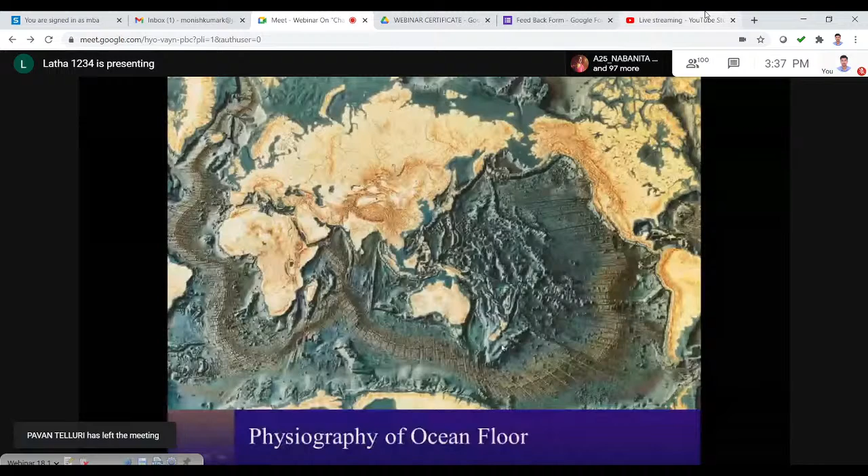So now we will go to the discussion. I will give you the cream of information on this subject. When you look at the world, if there is no water in the ocean, it looks like this. It is much more ups and downs and corrugated, because the world is made out of a few plates which are all moving relative to each other. So you see our India and the surrounding plate. Within this plate itself, you see the ups and downs here. So the whole world is extracting different types of resources to improve the economy.

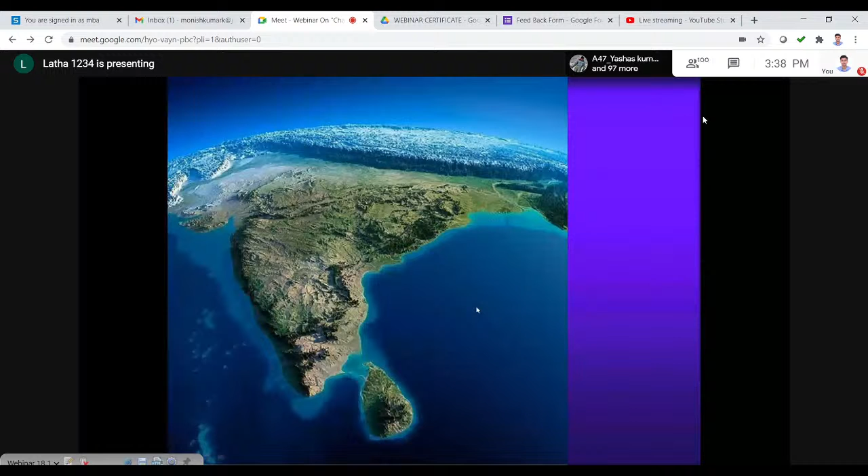And as the Vice Chancellor was indicating, we are not yet effectively using the resources of the ocean to contribute to our GDP. One of the main reasons is we don't have many ocean engineers in India. Not many institutes to train young people like you to become good ocean engineers. We have only very few institutes. The details I'm going to give you. So that is one of the reasons many of our resources in the ocean are not properly exploited. We have to do that.

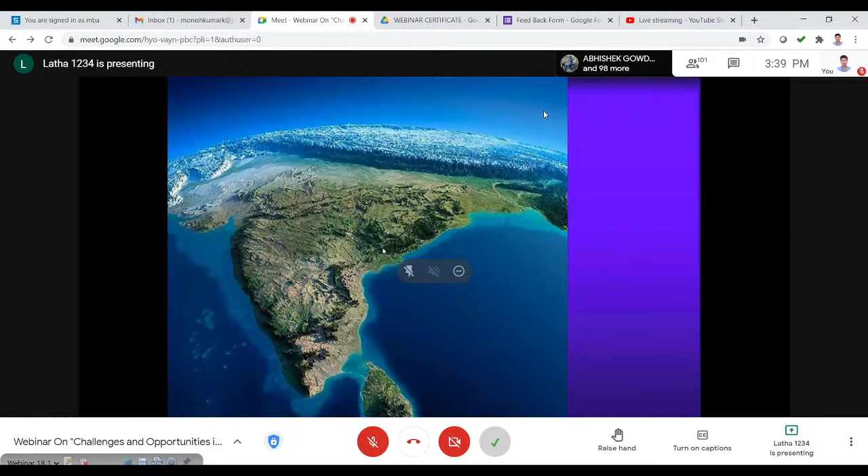Like a green revolution, white revolution, we have to do a blue revolution. Blue revolution is using the ocean and extracting the resources in a sustainable manner without harming the environment, but extracting them for the benefit of the people in India. So for that we need more scientists and engineers in the area of ocean engineering.

Now some of the true facts about the ocean. The ocean covers 71% of the surface. The ocean is a future source of power. All different powers from wave, tide, ocean thermal energy, biomass, water current, these are all sources of power from the ocean.

Ocean is a good source for all types of organic and inorganic material. Any organic substance you name, it is available. Inorganic substances are plentifully available in the ocean. Ocean is a source for potable water.

For us in Gulf countries, in Kuwait, for example, 100% of the potable water we get from the ocean based on desalination. In future, many countries will go for this as population increases. The land-based water resource may not be enough, so we have to go for ocean water for converting into potable water.

Ocean is one of the fantastic recreational sites for people. Who doesn't love to go to the beach to spend some evenings? Many people love to have their homes near the beach because the music of the waves moving and breaking and the marine life, they all attract people to stay near the ocean, and it is a lovely recreation.

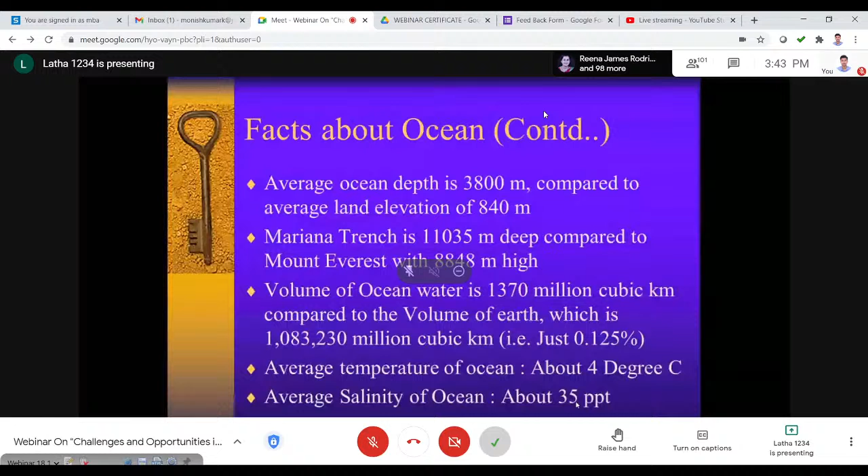Average temperature of the ocean is only 4 degrees. See, that is why it is working as an air conditioner. Average salt content is 35 parts per thousand. Take 1 cubic meter of water, evaporate it, you get 35 kilograms of salt. The predominant salt is sodium chloride. Then you get many other minerals, magnesium, calcium, like that, plenty. A typical coastal area, you see, is like this.

The coastal area is the highest in biodiversity on the earth. Everybody nowadays is talking about blue economy, meaning how to use the ocean to improve the economy of the country. Tourism and development in many countries, like Dubai and Singapore, are because of good beaches and good coastal infrastructure. Why do people visit these countries? Because they have very good tourism development related to coastal and ocean infrastructures.

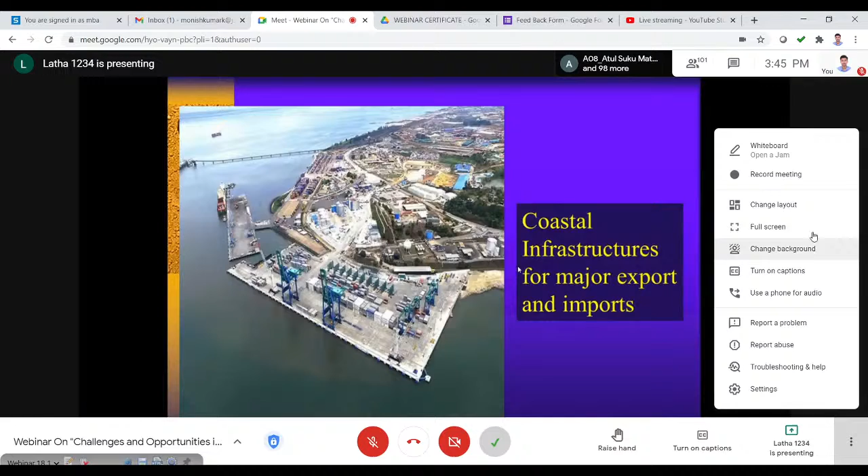We can talk a lot about different types of coastal infrastructure. One of the main infrastructures for every coastal country is ports and harbors, like this. Without ports and harbors, no country will export and import goods economically. So to develop such infrastructure, you need engineers with specialized knowledge in the area of analysis, design, construction management, maintenance, operation, periodic servicing, and new infrastructure development of these types of facilities.

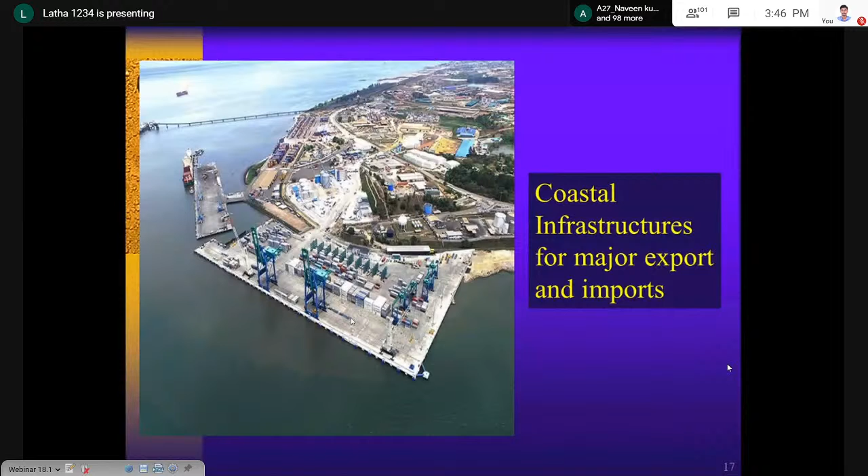So you need special knowledge: civil engineering plus additional knowledge for successful construction of all these facilities. We will see them one by one. Not only civil engineering infrastructure, but nature's infrastructure. As engineers, we need to also understand how nature builds its own infrastructure, like mangroves.

Even in India, we have many coastal areas rich in mangroves. In the southern part of India, including Karnataka, many areas have wonderful mangrove forests on the coast. They are actually natural civil engineering structures. And natural corals are also engineering structures built by nature for the beneficial use of humans.

The coral reefs and the beach area help develop a lot of life. Also, they break the energy of the waves during storms and help us reduce beach erosion. If corals were not there, a lot of areas in India as well as around the world would lose the beach.

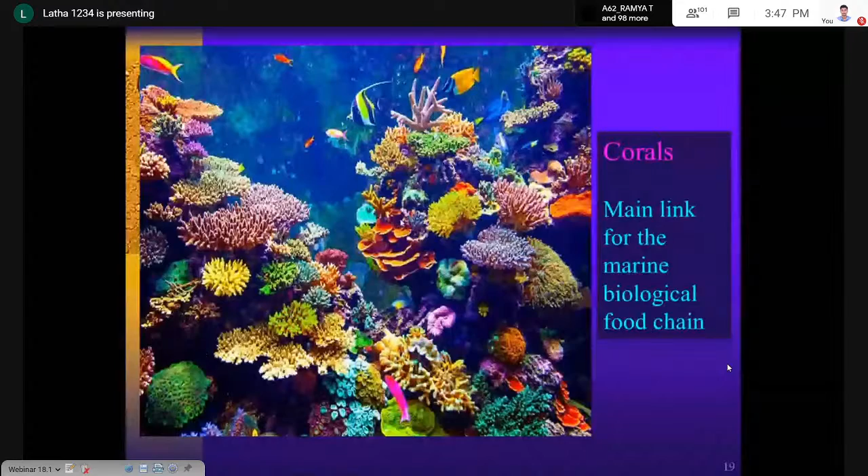Sea also contains many different types of seaweeds. Many countries use it as a rich source of food, like Japan, Korea, China, and all Southeast Asian countries. They all use different types of seaweeds as a source of protein and minerals. We don't use it in India, it is not the culture, but the truth is it contains a lot of very rich nutrients. And people nowadays also try to use this as a biofuel.

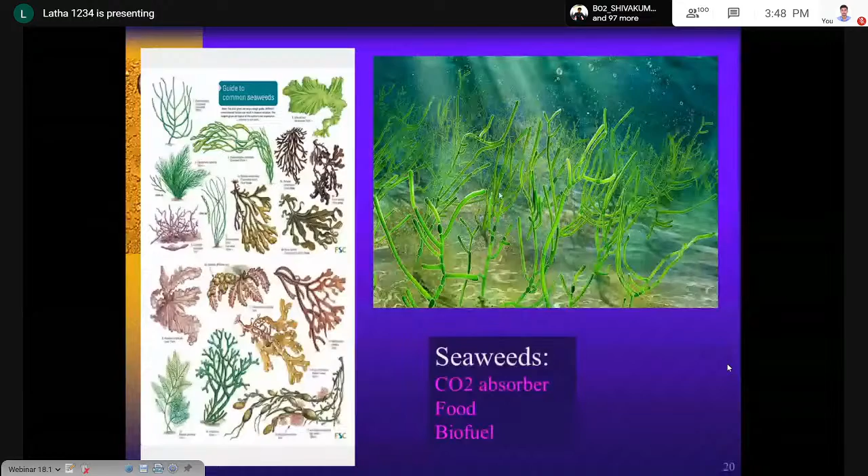So to exploit these resources, you need engineering, correct engineering. I am sure everybody knows about the benefit of the ocean for protein in the form of different types of fish, prawns, crabs, shells, also octopus, you can name it, all these things, plenty.

Ocean, as I told you, is a natural air conditioner. It works as an air conditioner by moving cool water from the north and south poles to the equator. So when it is moving cool water from there to the equator, all the countries around the equator become cooler. And when it moves hot water from the equator to the northern countries, the chillness reduces in the northern countries. So that is the way the great ocean belt works here in the Atlantic Ocean, Indian Ocean, Pacific Ocean. The ocean does it by nature, following the principles of physics.

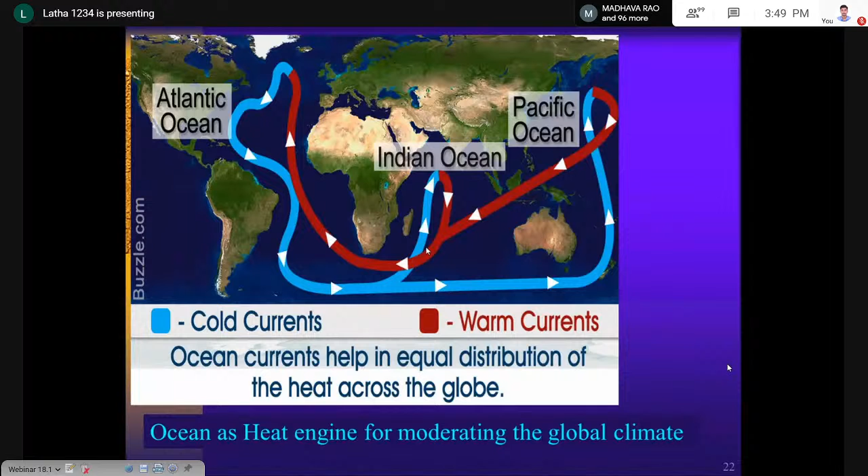Imagine as a human being, if we wanted to do it artificially using our knowledge, every day we would have to spend many billions of dollars for cooling the land masses here, for heating the land masses here. If we wanted to burn fuel, billions of dollars we would have to spend every day. Ocean is doing it free of cost.

Ocean is a very rich source of energy. Many different energies, for example waves, current, offshore wind energy, a huge amount of energy is available. As engineers, we have to design systems correctly to extract the energy efficiently. Even in deeper water, nowadays, knowledge is developed to make offshore floating wind farms with each windmill about 7 megawatts. That is the order of capacity people have developed over the last 20 to 30 years. So engineers need to work here to design and install different types of structures to extract renewable energy.

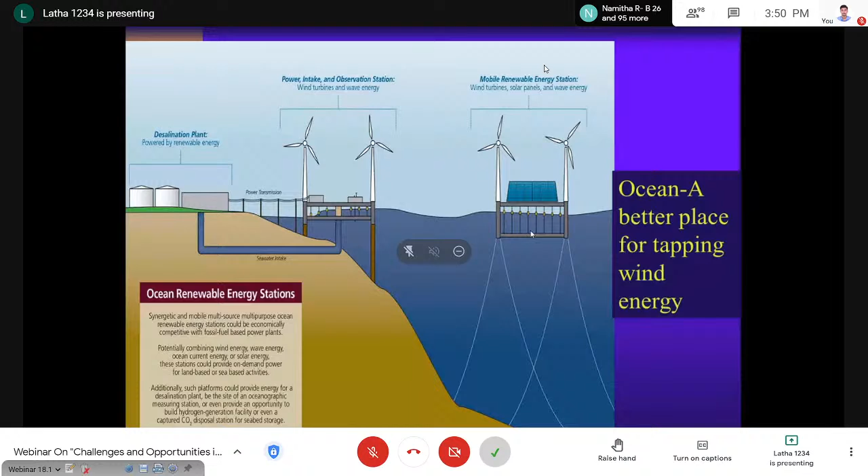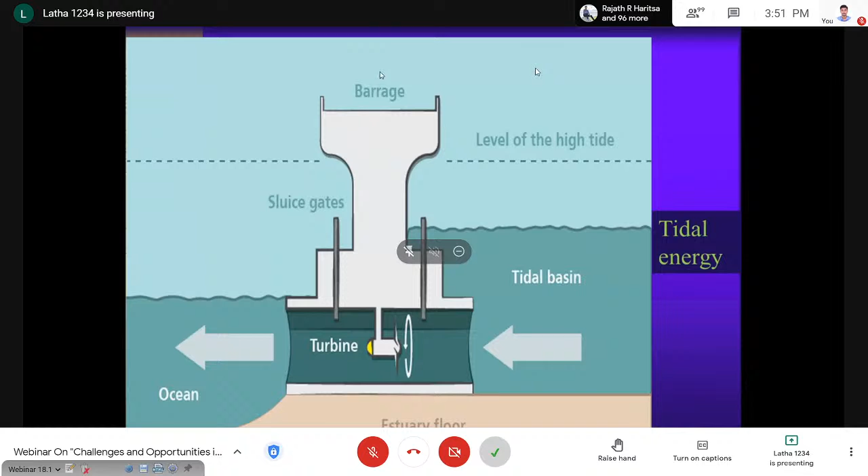Also, we need engineers to design tidal barrages to extract energy from tidal variation. For example, in India, around Gujarat, also in West Bengal, we have huge tidal power potential. But we don't have enough engineers to design the system.

Ocean contains unbelievably huge energy from thermal temperature change. It is called ocean thermal energy. This ocean thermal energy itself is sufficient for India. For example, the seawater around India, if we extract energy using ocean thermal power, that is more than sufficient for India. We can stop all power production using coal, oil, and wood. We can stop all the polluting sources.

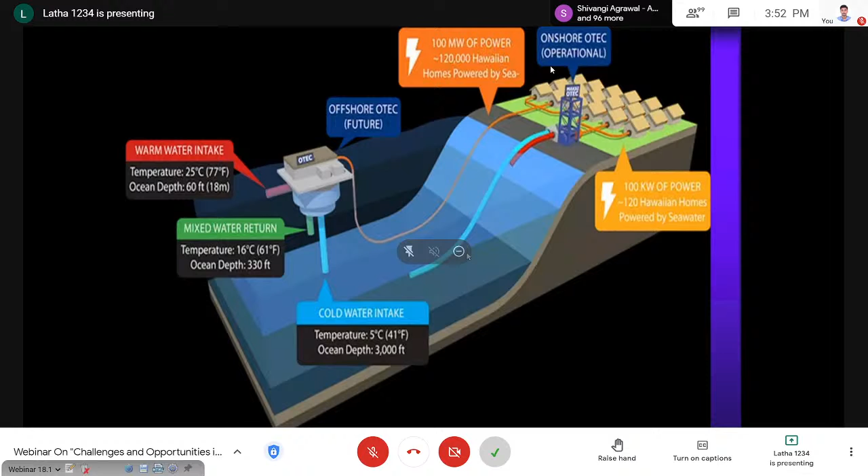Science and technology is available, but what is not available is an economical way of building these infrastructures. So that is where the challenge is. Engineers like you can work on this type of civil engineering structures, how to make them economical from the material point of view, from the construction point of view, from the installation point of view, by increasing the lifespan, selecting suitable material for the ocean. You can select these areas to work on for the success of this type of power.

Desalination: in many states in India, people are already using desalination. For example, Chennai always faces water problems in summer, so they are installing additional desalination plants. So even for desalination, you have to take water from the sea. Taking water from the sea, you have to build a structure. That is where the engineering challenges are.

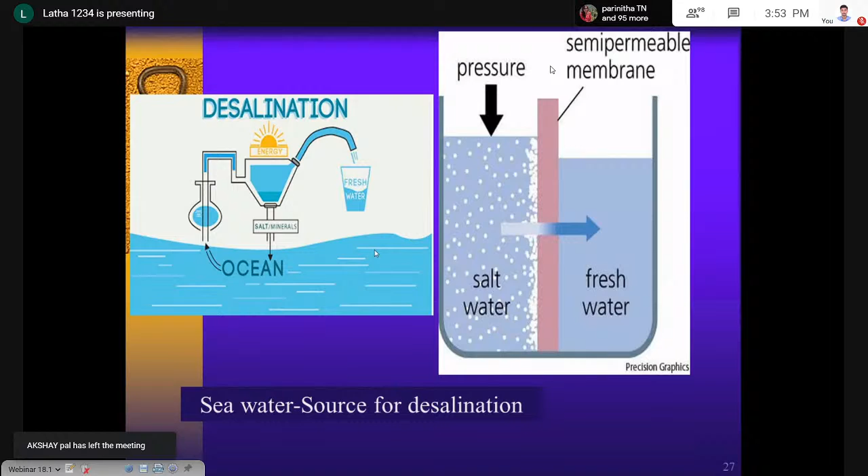Apart from all these things, the ocean is a source of wonderful medicines. You can extract so many quality medicines from ocean water, the ocean seabed, from corals. Unbelievably, the ocean has so much medicinal value. So if anybody starts an industry to make ocean medicine, you will really flourish in this business. The ocean gives such a great opportunity to start your own industry.

The total coast length of the world is 1 million kilometers. This is the length of the coast of the whole world. These facts will fascinate you. More than 600 million people, that means around 10% of the people, live in the coastal area. Similarly, 2.4 billion people live within 100 kilometers. So this shows how important it is for people; they want to live closer to the ocean, in the coastal area.

Nowadays it is always required for an engineer to know the economic value of a project. After your graduation, if you work in a construction company, say L&T, Larsen & Toubro, and you are working on a project, people will always ask you, what is the project budget? And you will say it is 1,500 crore, something like that. You will say, I am working on a project constructing a 3-kilometer bridge in the ocean or crossing a river, which is so much crore. So it is always required to know the economic value of the project.

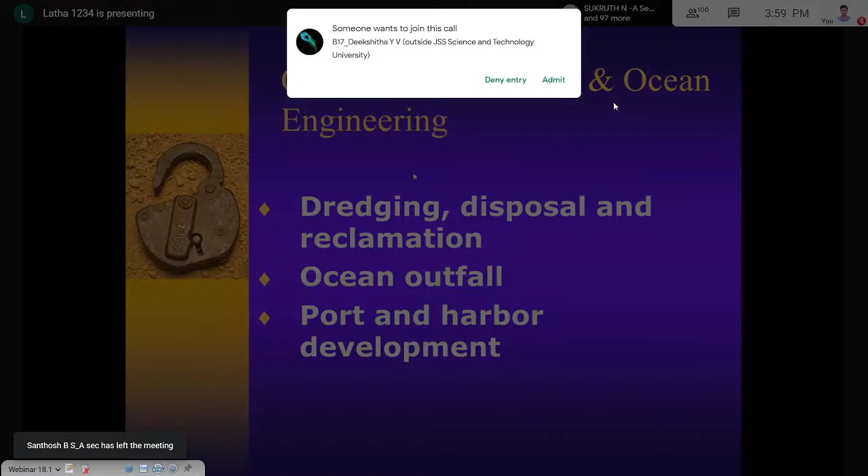For that we have to know the environmental forces from nature: tsunamis, waves, tides, cyclones, global warming and sea level rise, coastal erosion and how to control it, and how to dredge material in the ocean like Dubai. Dubai is building a lot of infrastructure into the ocean by dredging and using the material. Singapore is increasing its land space by dredging from the sea and building new islands. Many countries are doing new land formation and new island creation in the ocean by this type of activity.

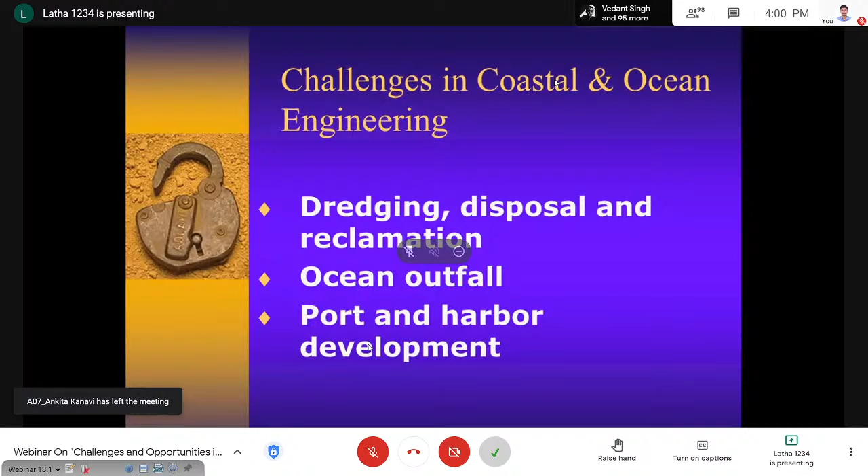We also use the ocean for proper disposal of wastewater; there you have to design a disposal system. And we have to build new ports and harbors for countries' development. There you need a lot of knowledge. If you work for a desalination company, you have to know how to take water, and after desalination, how to dispose of the water properly. All power plants in coastal areas around the world take water from the sea for cooling, so here also we have to know how to take water properly. And saltwater intrusion is one big problem.

The seawater intrudes into the land aquifer. I mean, the water resource in the groundwater is intruded by salt water, so we have to learn how to prevent it. And anybody who wants to join offshore ONGC, Oil and Natural Gas Corporation, they design offshore drilling platforms, install them and extract oil from the sea. So you need to learn the ocean engineering subject.

Mining in the ocean: many minerals we don't have enough of on the land, so we have to go to the ocean for mining. Energy: even if all the energy sources are completely vanishing, still we have energy from the ocean we can extract. Engineers also need to know how to prevent corrosion of ocean structures. And you also have to learn about sediment transport and its problems.

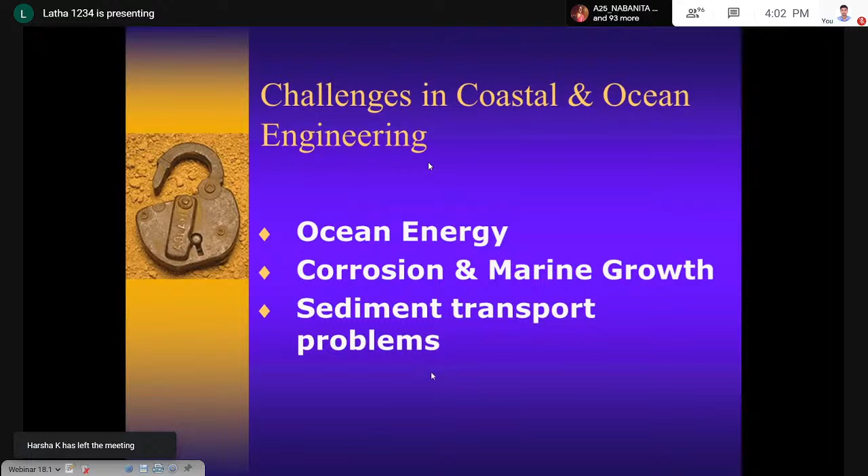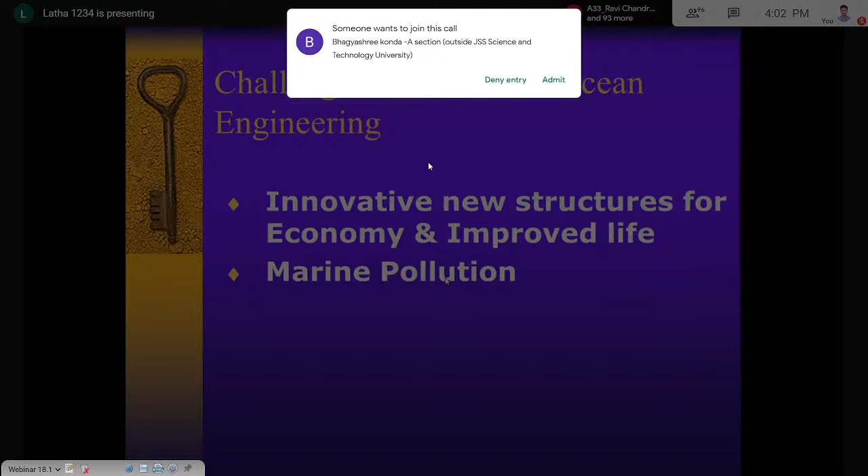If you go for higher studies, PhD, postdoctoral, then you will land up in a good research institute doing innovative work. So that is the topmost point in this discipline. Innovative structures are needed, mainly from an economic point of view. To extend the lifespan, we need a lot of innovation.

Pollution in the marine area is one of the big problems. We need a lot of engineers to work and reduce ocean pollution. Particularly nowadays, plastic pollution in the ocean is becoming a big problem. We need more engineers. We will see one by one, quickly. I am not going to explain in detail, but I will quickly go through pictures so you know what it is.

Tsunami is because of an underwater earthquake. You know that. India is in a place where tsunami possibilities are always high, risky. Particularly the east coast of India has tsunami risk from the Indonesian plate junction. Similarly, the west coast of India also has tsunami possibility from the Pakistani plate.

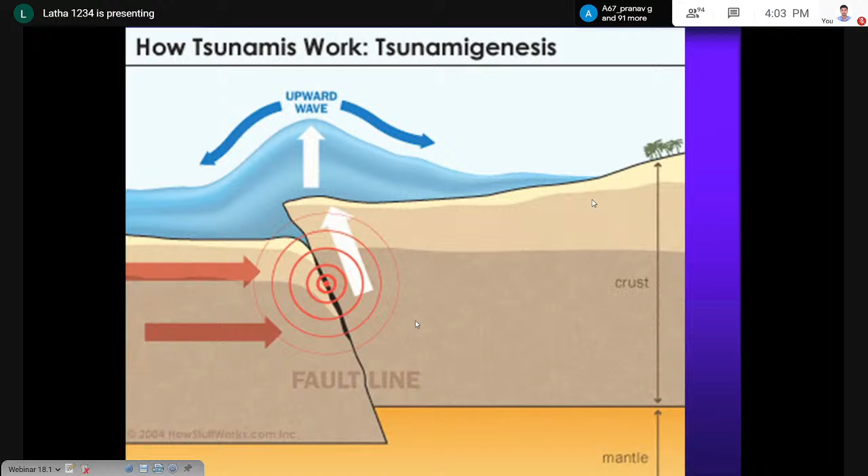During a tsunami, sometimes you will get waves of many meters, equivalent to many floors of a building. If it occurs, they completely destroy infrastructure. So in such a situation, as engineers, we have to know how to design structures with such strength, or how to manage to escape from such impact. So we have to learn. This is another picture. You might have seen it in some videos of tsunami-induced flooding in the coastal area.

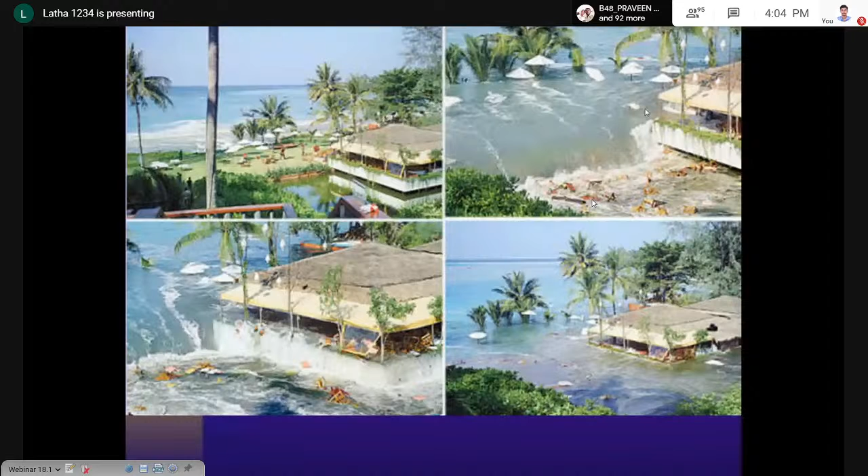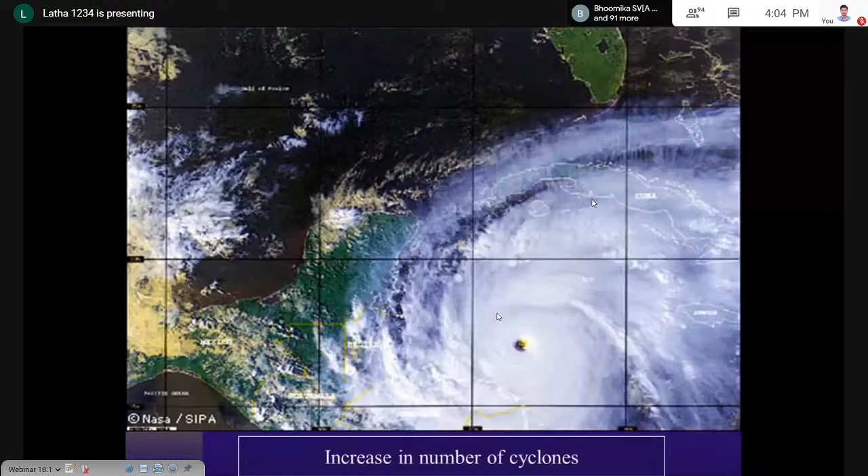Secondly, cyclones. India is prone to cyclones, and many infrastructures we have to design for cyclone wind speed. So, cyclones we classify into 5 categories. Category 5 is the worst cyclone, with a wind speed of more than 155 miles per hour. 155 miles per hour means almost 250 kilometers per hour. Every year we have this type of cyclone, not only in India, everywhere around the world.

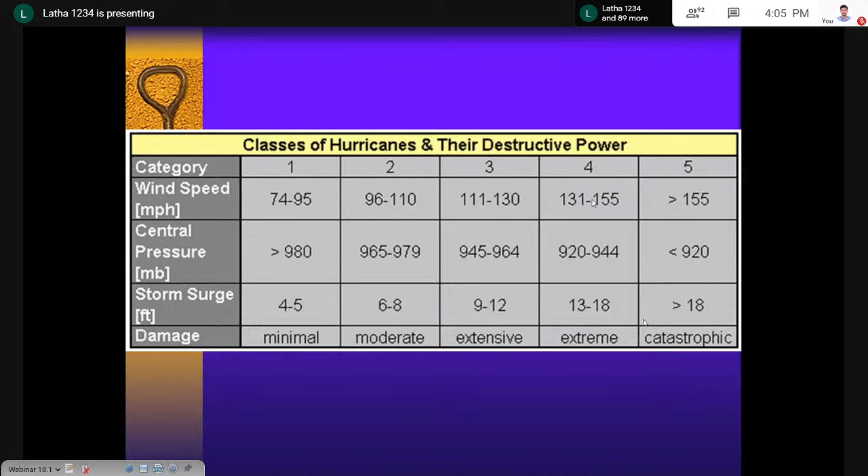With the storm surge, the water level surges to more than 18 feet, 5-6 meters, entering into the coastal area. It creates a catastrophe. So we have to learn how to protect life and property from such types of events. We need to design infrastructure to take care of such loading.

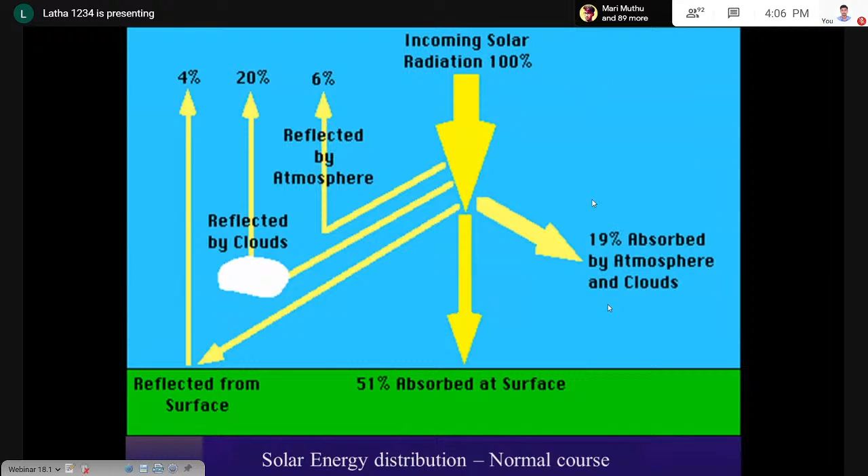Global warming slowly keeps on increasing. The warmth of the globe is increasing. Because of that, sea level is rising. Before industrialization, the solar radiation falling on the earth all went 100% back. Now it is like this. See, now because of greenhouse gas, not all the solar radiation goes back; it is retained here.

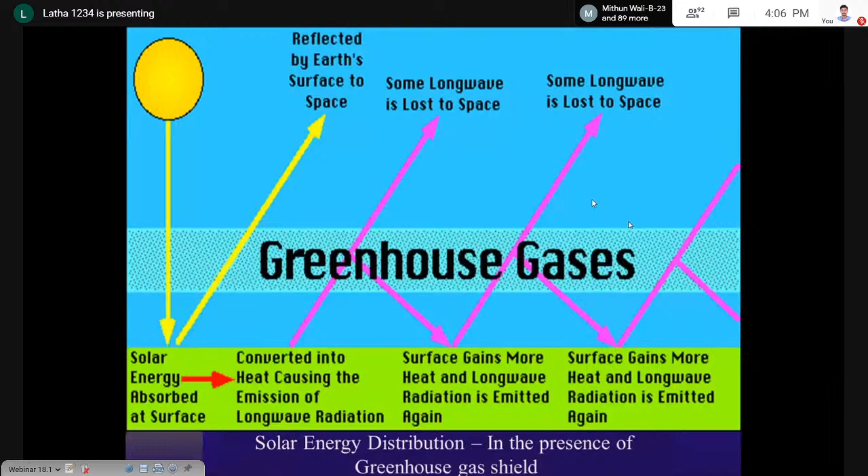What I mean is, in some major cities like Beijing, Delhi, already the carbon dioxide level sometimes crosses 700 ppm. So it is not good to live in such places because it will create asthma, all types of problems related to breathing. Imagine if it goes like this. Who can live in a place with 1000 ppm of carbon dioxide? Nobody can live.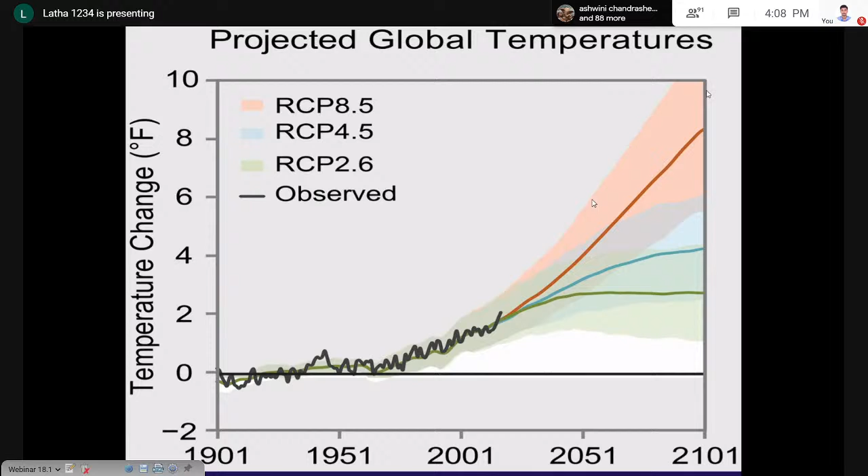So we have a great role here. As an ocean engineer, we have a much bigger role in this part. Similarly, the atmospheric temperature in 2100 may increase by anywhere from 2 degrees to 8 degrees Fahrenheit. You can imagine easily: if 8 degrees Fahrenheit is the increase in temperature, how do we live?

It is very difficult. Similarly, the sea level may rise by 1 meter by 2100. A 1 meter sea level rise means major cities in India will all be in water. Okay, so like this. From an engineering point of view, we will see some of the important engineering aspects. First, I am going to talk about coastal erosion.

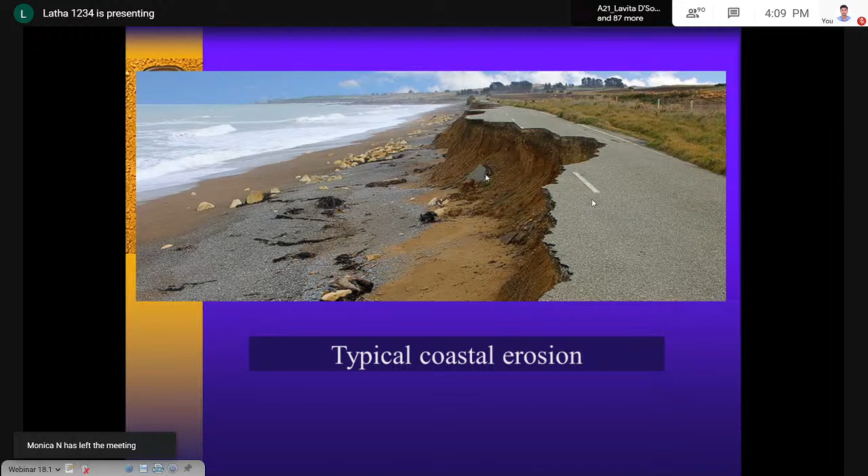The world spends more than a few billion dollars every year for erosion protection. Erosion is nothing but removal of coastal soil from the coast, from infrastructure like roads, buildings, anything here. If the soil is removed, it is called coastal erosion. As an engineer, we have to design coastal protection. This is a problem. So how to solve the problem?

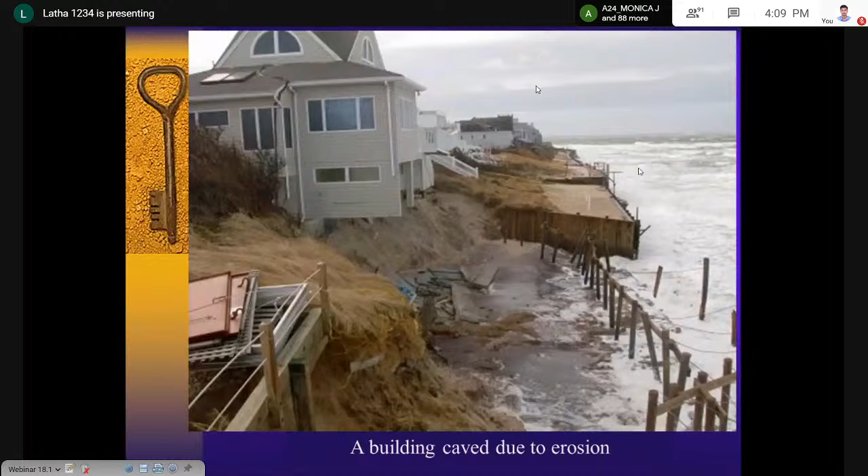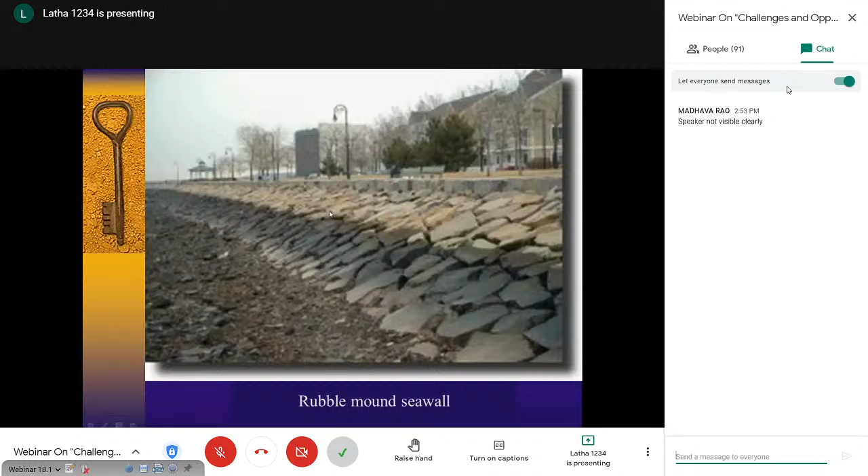And there is another solution called a seawall. How to design them? This you will learn in ocean engineering. Or designing a sheet pile wall. I am sure you are all learning soil mechanics and foundation engineering, but you have to extend your knowledge to design them in a situation like this, where one side is water with waves, the foundation is fully saturated, and on the other side you have land with elevated infrastructure.

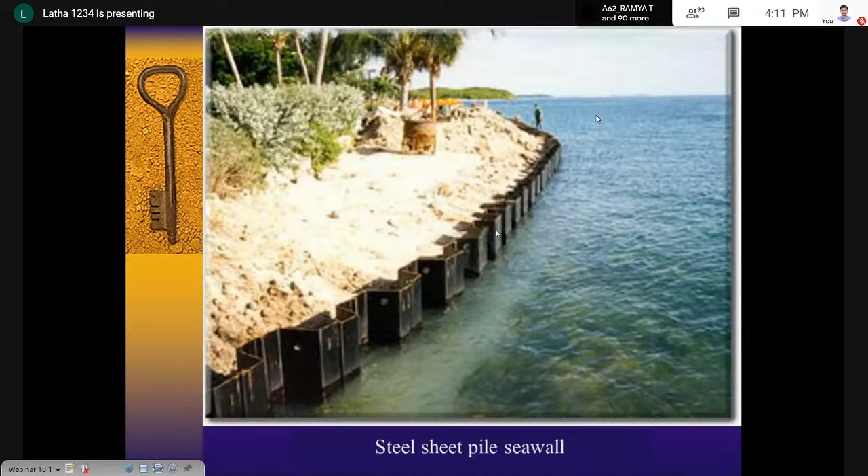So you have to extend your knowledge to design sheet piles, and you have to design them to make sure they are not going to corrode quickly. So you have to be an engineer who designs corrosion protection as well.

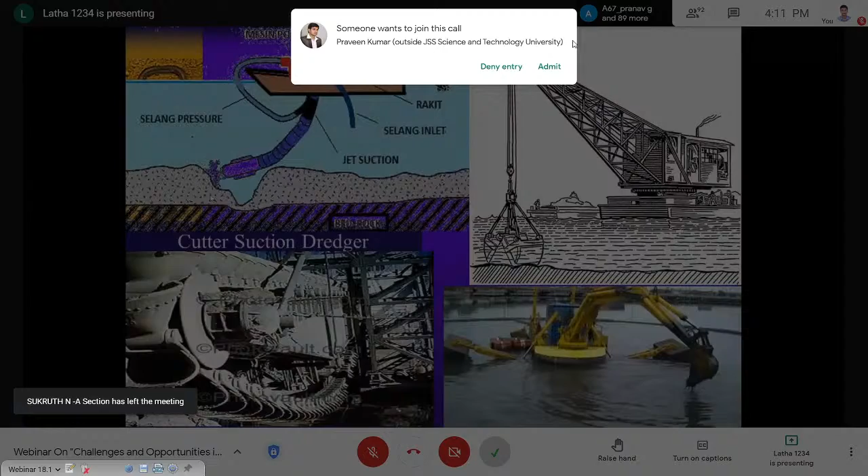Dredging and disposal is another engineering area. You have to learn what type of subsea soil is available at a particular site, whether it is clay, silt or rock. As an engineer, based on the seabed material strength, you have to select a suitable dredger, and after dredging, you have to either reuse the material, like building islands in Dubai, or dispose of it correctly.

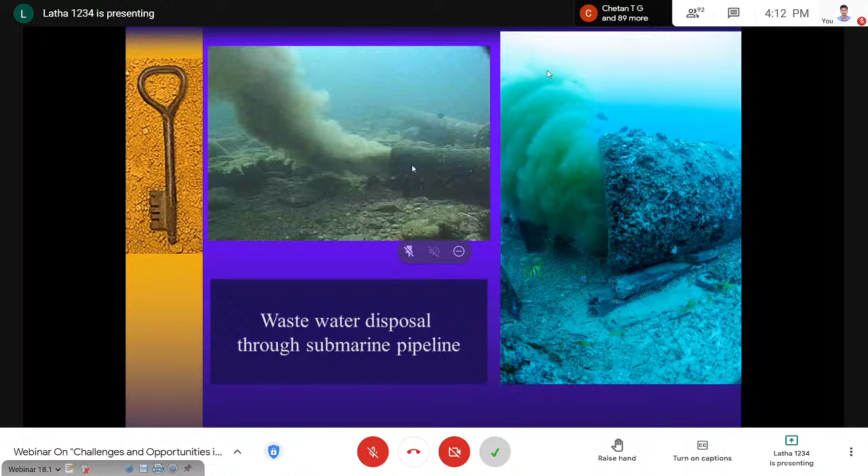If you want to send this wastewater into the sea, you have to go into deeper water with a submarine pipeline; you have to design pipelines, and this is completely an ocean engineering subject. Wastewater coming from the land after preliminary treatment is stored in a tank to provide enough head to push the water. Water goes through the pipeline, and you discharge it at many points to make sure it is not polluting the area and pollution levels are within permissible limits. So this is the engineering you have to design.

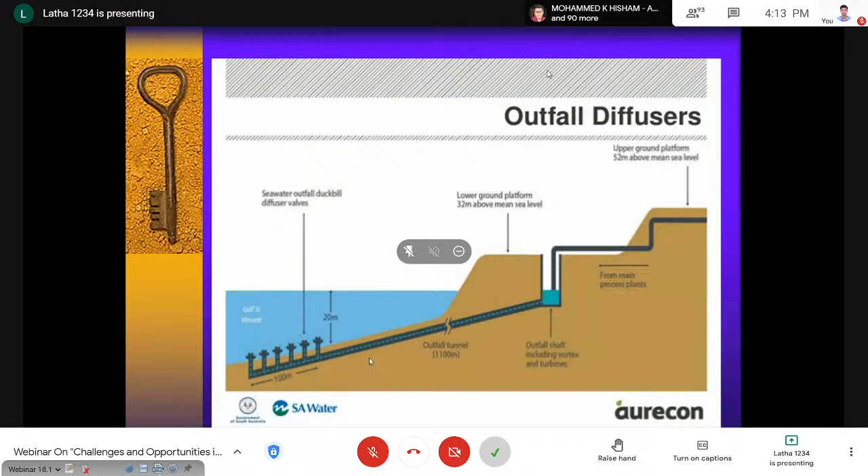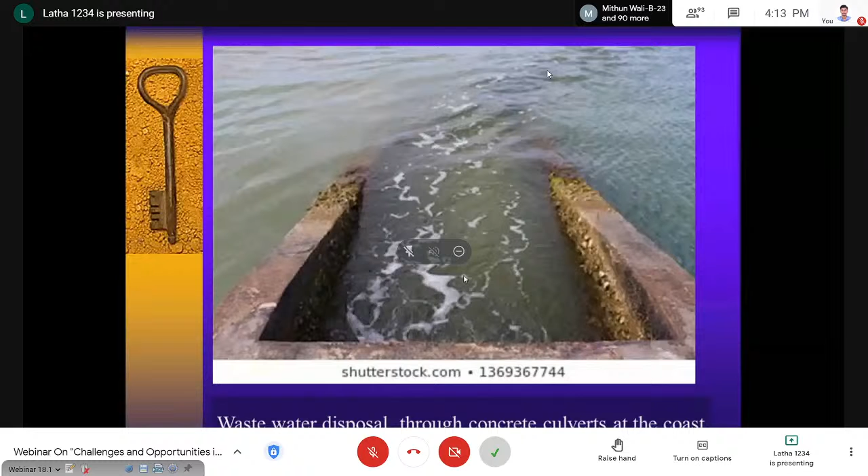In many countries, people dispose of wastewater in the coastal area, which is scientifically not correct. So I am showing this picture, which is not correct. People have designed culverts to dispose of water in the coastal area, but it is not an environmentally right approach.

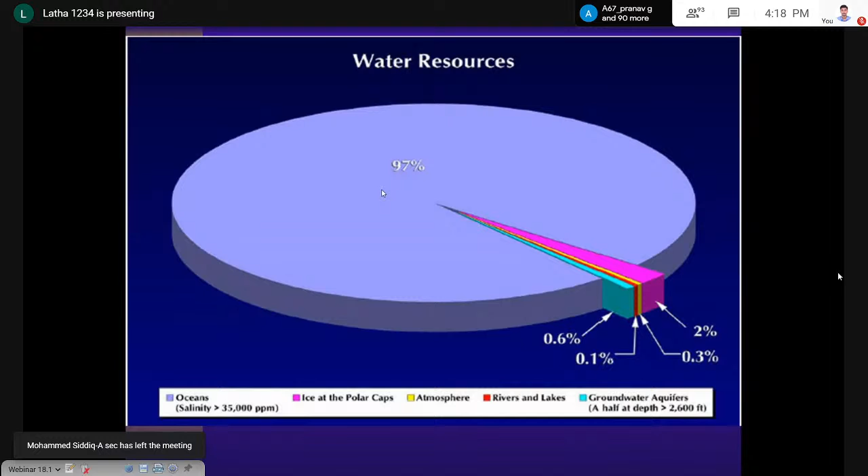So we have to know ocean contains so much of water. As an engineer, we have to know how to take the water and efficiently convert it into fresh water using desalination. Similarly, cooling water for power. All power generation in India on the coast, they take water from the sea.

And we people, we work on this infrastructure development. How to design this infrastructure for seawater intake. For example, you have to take water from here without sediments, without marine life. You have to filter and then take the water. The water coming here must be clean. Otherwise, if water is not clean, when it goes into the system, it will create a lot of maintenance problem. So you have to design a seawater intake system with the screening. Concrete structure, strong enough, sitting on the seabed, like that you have to design.

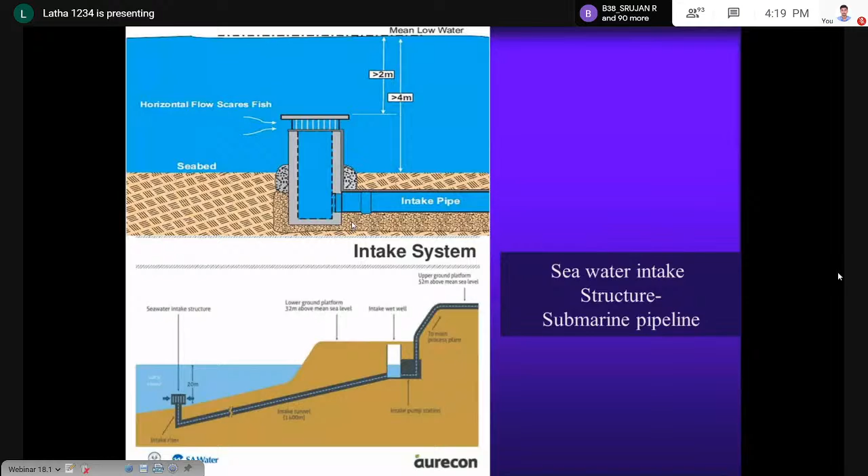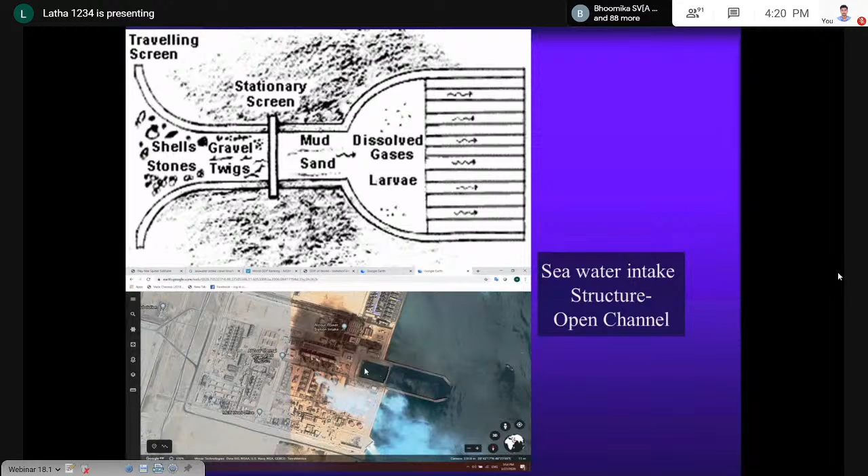It is a typical seawater intake structure in Kuwait. You see here, this is a concrete wall. Another concrete wall, we have screen here. So we design these type of structures. So then what will happen? Water will enter, primary screen, secondary screen, clean water here. We take this water for cooling of power plant.

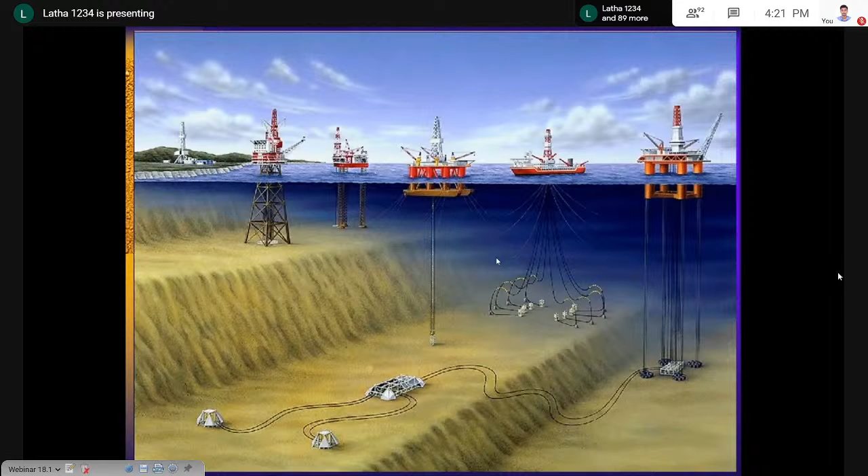Next important engineering aspect is subsea oil and gas exploration. And you might have heard about all these things. In India also, ONGC, GAIL, many companies, Cairn, they all do this offshore oil exploration. This is the type of structure India uses in shallow water condition, like 100 feet. People make a steel structure called jacket platform. So we are the engineers who work out on the wave forces, impact, loading, and then we design these structures.

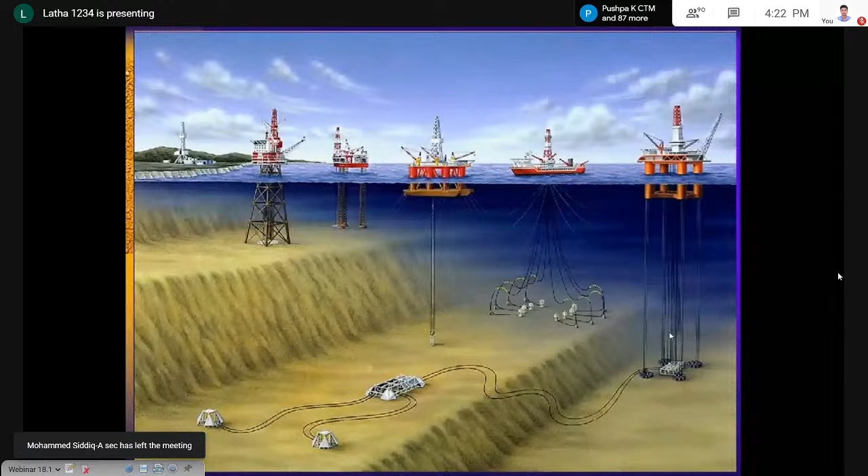Okay, similarly other structures in deeper water. When you go to deeper water, order of kilometer, you cannot have this type of structure. It will not work out economically. So you have to have tension leg platform. This tension leg platform, they move with the wave forward and backward. So as an engineer, we have to analyze its movements. We call dynamic response. And we have to apply enough tension here to take the load to the foundation to make sure they are not drifting. Okay, like that. So all these things you learn in ocean engineering.

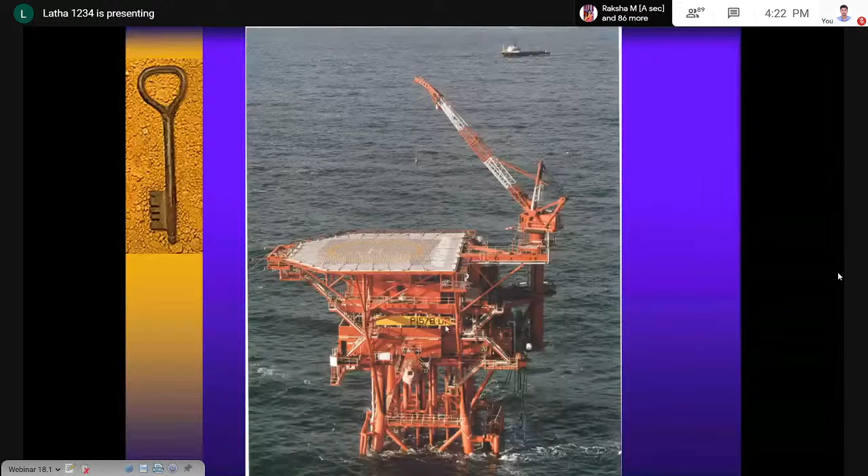Okay, so you have to design them for extreme winds. The upper level of the deck, you have to design for extreme winds, and we need to know how to design. Also, we design gravity type platform where you have concrete structure, huge. This is like a 25-30 meter diameter, huge structure. People build it, and when they extract oil, temporarily they store oil here. When ship comes, they transport the oil, then they fill it with water. Okay, like that. And in deeper water, they extract oil and then pass it to the ship.

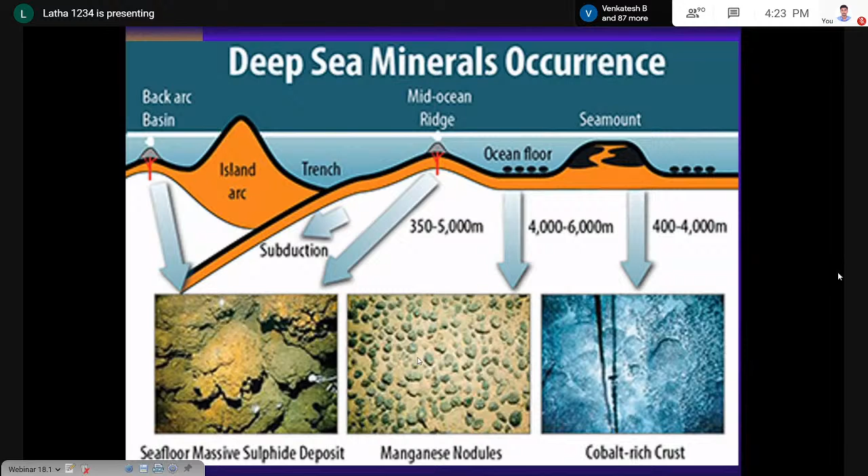Mining is the next engineering. Okay, ocean bed have so much of different minerals, like sulfide, manganese nodule, cobalt. These are all minerals at ocean bed. So we have to do economic exploitation of all these minerals. Next one is ocean energy.

Just to tell you, to create interest, 2025, the whole world needs 30 million megawatt energy. This much is a requirement, 30 million megawatt. You just see how much is the potential of OTEC itself. 40,000 million megawatt is a potential. What we need is only 30. What is available is 40,000. So what does that mean? We have more than 1,000 times our need available as energy in OTEC alone.

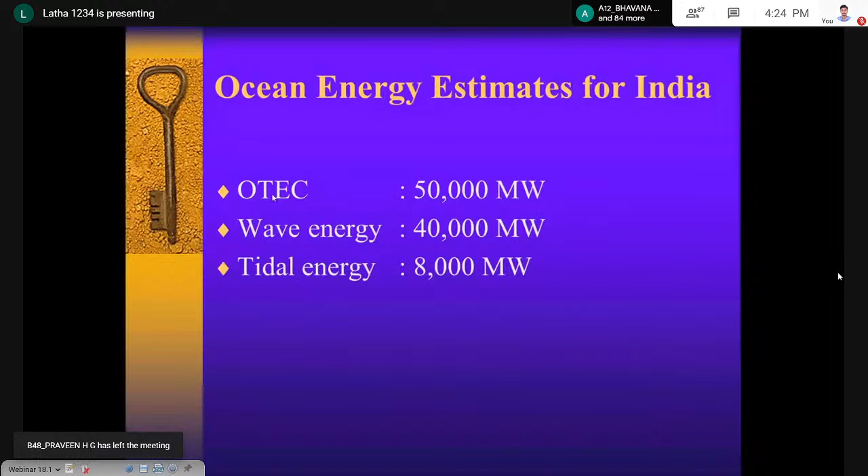But still in India, particularly for example, west coast of India, Karnataka, Kerala, Goa, Maharashtra, they have enough wave energy potential. Technology is developed, but civil engineering cost is very high. Okay, so I'm telling you, if you think how to reduce the civil engineering cost for the structure to extract wave energy, that is a very great area for your future. Okay, I can tell you.

So wave energy you can extract using different techniques, but every technique needs material and infrastructure. That is the common. Okay, in India we tried during 1990, we tried oscillating water column. In Arabian Sea, we built one pilot plant. I was really enjoying doing the work in the field, construction of wave energy caisson using oscillating water column. The civil engineering cost was 80%. So that was a problem. How to reduce them is the main point.

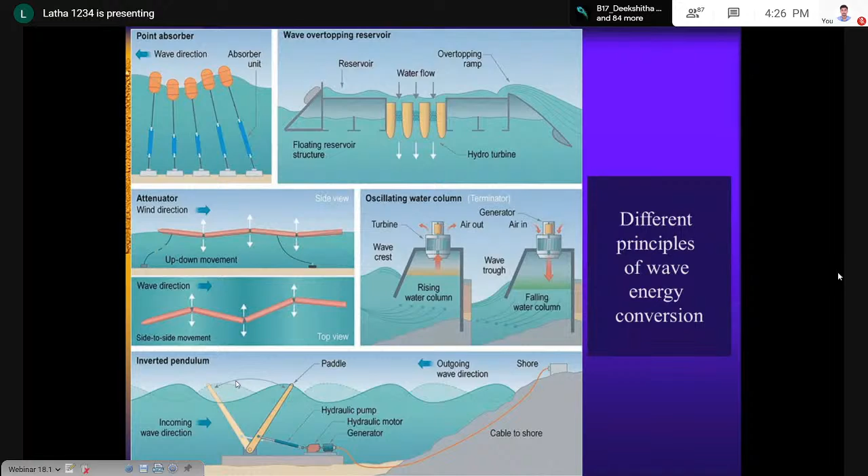And we are now advancing towards commercialization. In the near future, you will see commercial wave power plants. So if you get an opportunity to work on such power plants, it is a blessing.

Next is tidal energy. For example, you go to Gujarat, both sides of Gujarat, Gulf of Kutch, Gulf of Cambay. Sometimes there will be no water, sometimes you will have enough water. So you just build a barrage in between, and you will generate energy. It's like a dam, exactly. Principally it's like a dam, but you are using the potential energy of the water rising and falling.

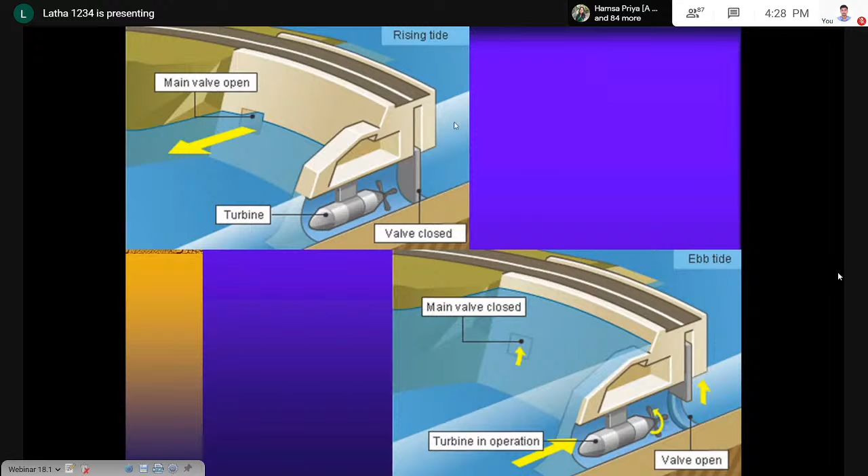As engineers, we have to know how to build these reservoirs in a dynamic environment. That is the beauty. We have very great experience building dams on land, freshwater dams. But we have to take the technology for building dams into a dynamic environment in seawater. That is what we have to do.

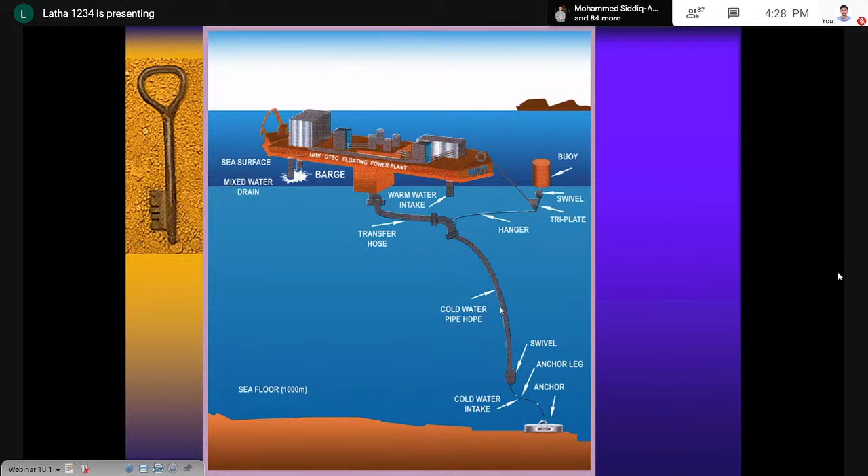Ocean thermal energy. The principle is, surface water is warmer. You go down by 700, 800 meters, the water temperature is almost 4 degrees centigrade. 28 degrees centigrade water here, 4 degrees centigrade water there. The temperature difference can be used to convert energy. So you need infrastructure like this. Pipes spanning 1 kilometer long, how to design them. So these are all the questions.

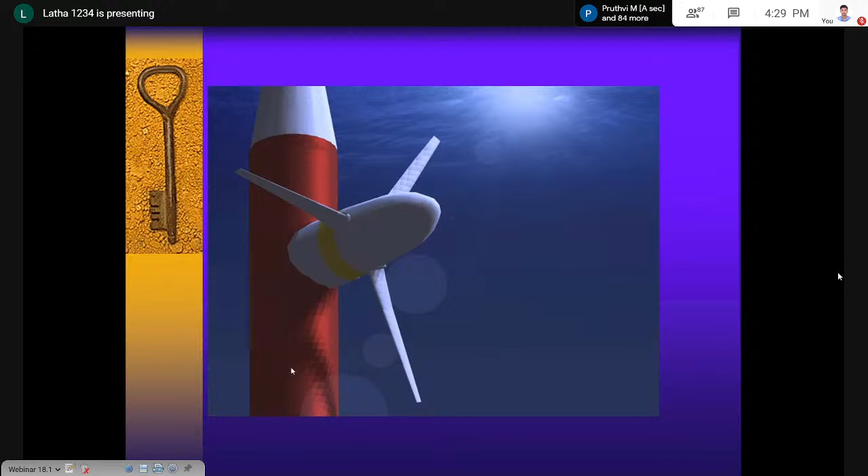Similarly, like a windmill, you can use turbines to extract energy from ocean water. We need to design the piles and how to drive the pile into the sea. All these things you learn. Though it is wind energy, the structure is in the ocean. Ocean engineers have designed this structure to install offshore.

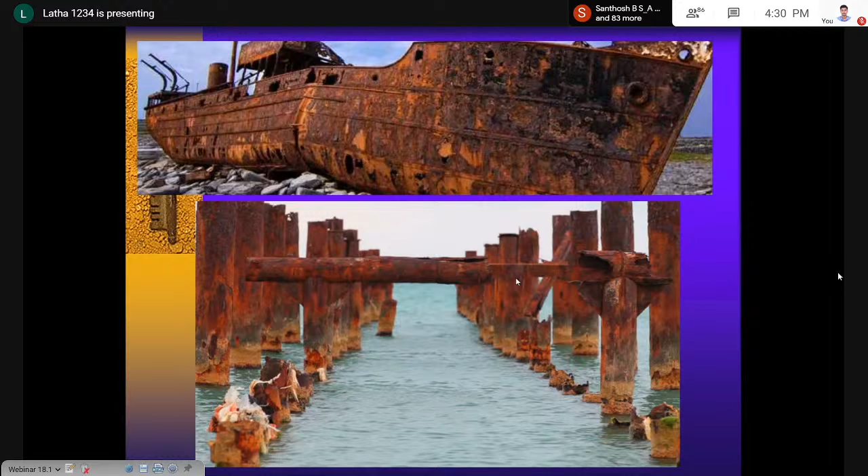Next is corrosion. I'm just showing you some pictures of corrosion and marine growth. It is a big problem in the ocean. As engineers, we should try to solve this problem. Sometimes poor painting results in very severe corrosion of ships and offshore structures. So nowadays solutions are available, either using zinc as anode or a proper polymer paint properly applied. We save the structures.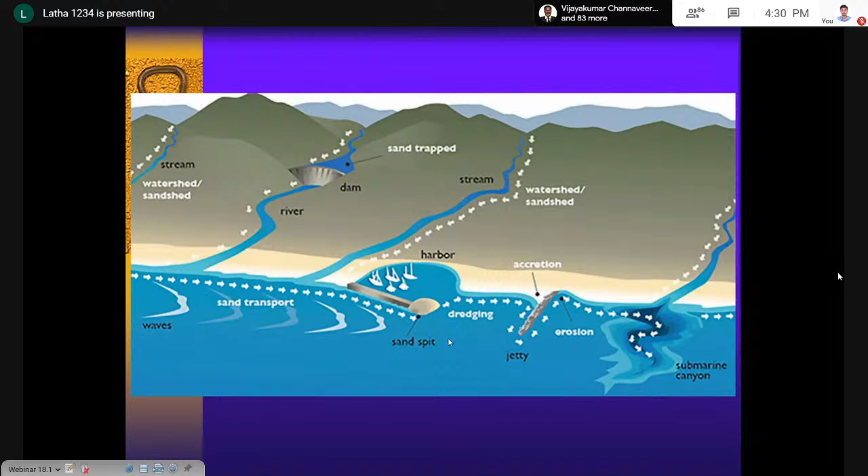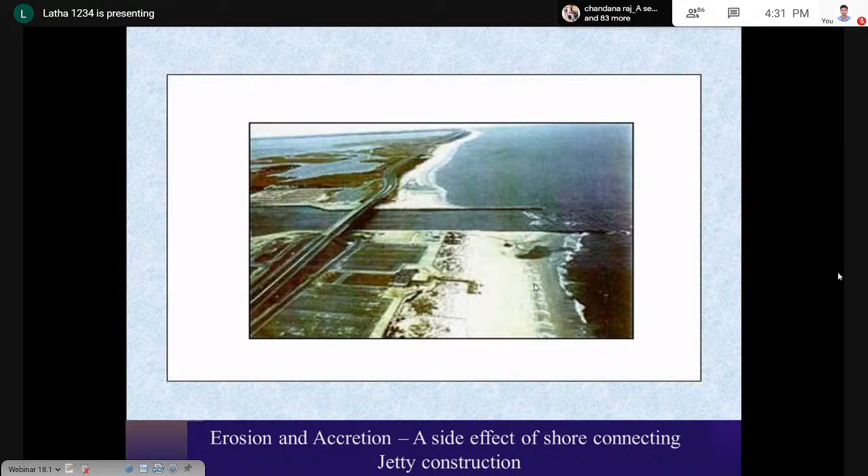For example, if you have a waterway with a fishing harbor inside, you need a jetty here like this. Construction of a jetty will result in beach, like Chennai Port, Chennai Marina Beach, and erosion here. To prevent such things from happening, we always think innovatively. As a marina, we take it into the sea like this and connect using a pile type of structure. So you can use the facility, but without preventing sediment movement.

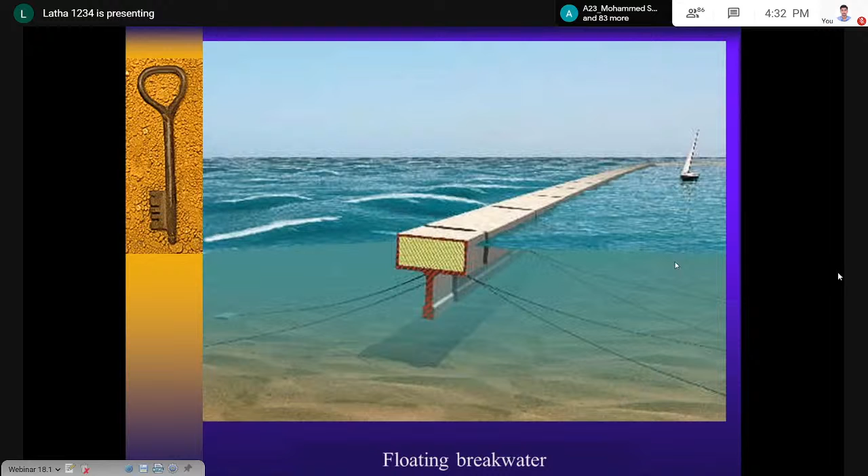You can also climb up the ladder of the ocean engineering discipline and go for innovative structures like this. This is called a floating breakwater. It's an innovative coastal structure. You build and moor them and make sure the waves here are smaller. So you do marina activity, harbor activity, construction activity here. We developed an innovative structure using this principle, and we got a US patent for this. A floating structure with legs like that.

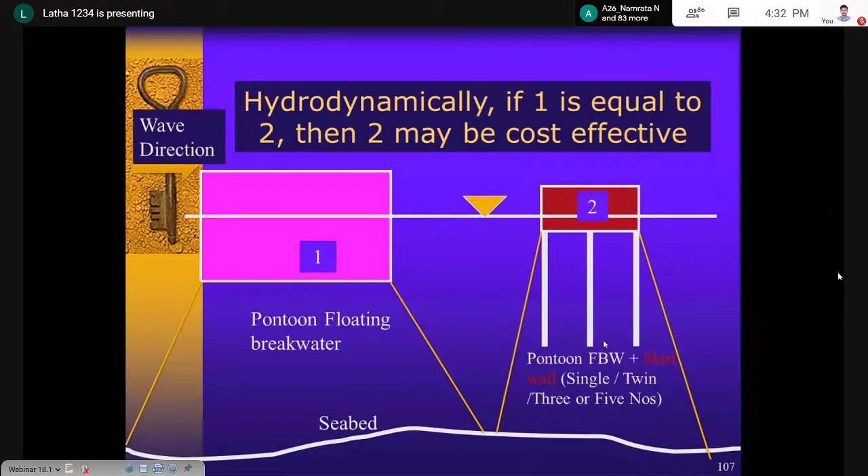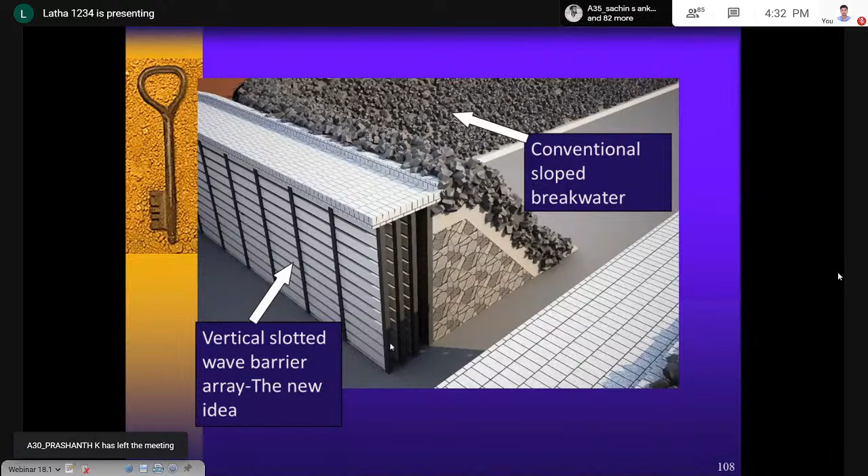And we also developed this new type of innovative structure. We got again a US patent for this, replacing a huge amount of material by a perforated wall. What this material is doing, this does the same work. So we innovate such things. As coastal engineers, we do innovation. These are all pure civil structures, but we have to understand their performance in dissipating energy. When waves enter here, this has to dissipate the energy to make sure the boats here are all safe. And nowadays we also use quality geo bags filled with sand to protect against beach erosion.

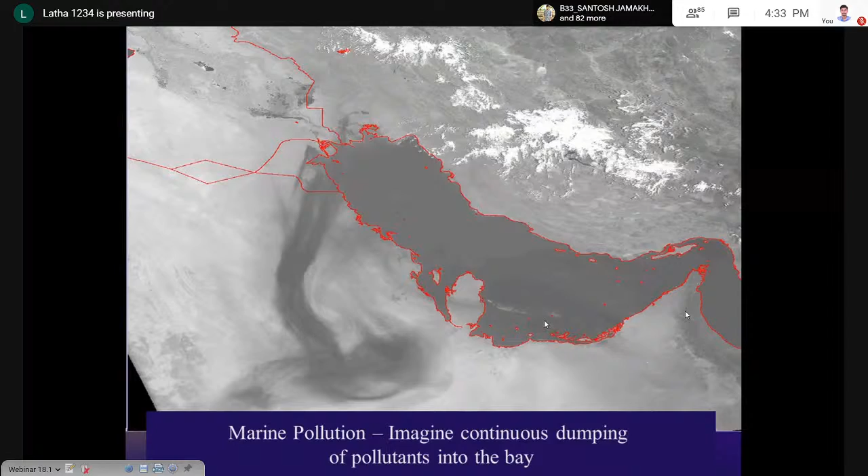Next is pollution, like in the Arabian Gulf. This is the Arabian Gulf, and we are here in Kuwait. All the countries here take water from here for desalination and cooling of thermal power plants, and after use the water goes back again. They pollute the space. So we work on how to reduce the pollution, ocean pollution during dredging activity.

So we do research and recommendations to reduce the pollution and reduce fish kill. When the ocean is polluted, it kills marine life. So we have studies on all those things. Good. Anyway, so these are all some basic information.

Now we will tell you where to go to get this knowledge in a proper university system, and what type of fellowships are available. I have to tell you this. Fellowships for higher studies in this area, in the US, Canada, Japan, Australia, European countries, you may know about them, but some of you may not. If you want to go to Germany, the DAAD fellowship is available. If you want to go to Japan for a PhD, the Monbusho fellowship is available.

Want to go to Canada, NRC; these are all government fellowships. Many of you know the fellowships available from professors, from projects, teaching assistant, research assistant, like that. But it's good to know about these government fellowships, NRC Canada, like this. Even Fulbright sometimes in the US gives fellowships for ocean studies. In Singapore, ASMI fellowships are available. MIT itself has a lot of fellowships for ocean engineering. Other than that, general students always look for teaching and research fellowships.

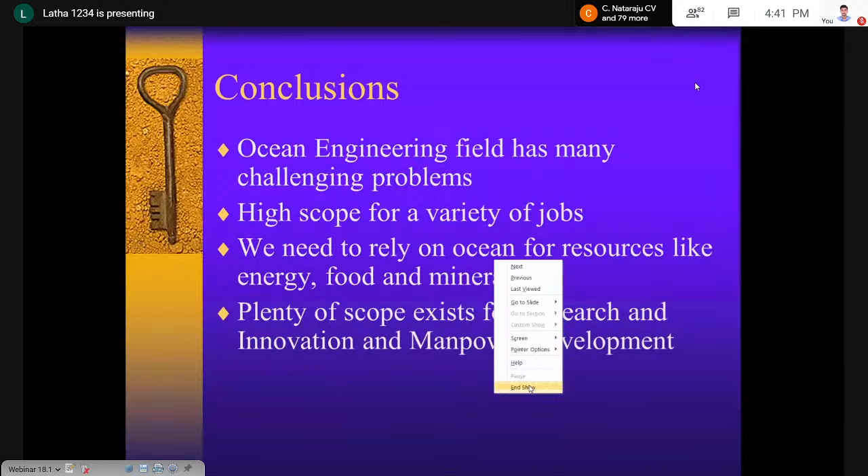To conclude, ocean engineering is a challenging field, a new field for many of you. Scope for jobs and higher studies is plenty. India is spending a lot of money to improve the blue economy. So in future you will have huge opportunity to work even in India. So from my experience, I encourage the students to select the subject if you are planning for higher studies. This is one area where you can make a lot of contribution, with facilities, fellowships and other things, job opportunities in India.